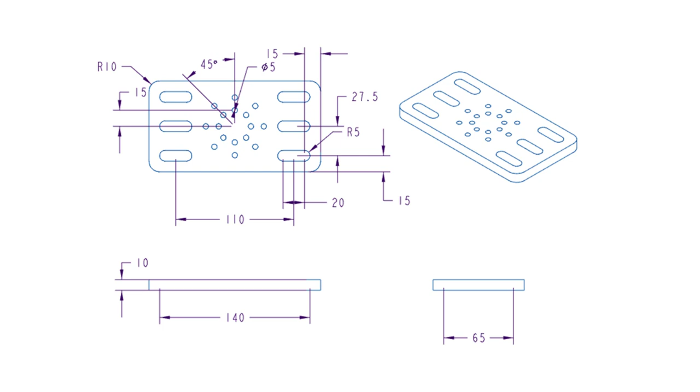Here's the 2D drawing for our Day 3 model, the slotted base plate. It's a 140 by 65 millimeters plate, 10 millimeters thick with rounded corners. We'll create racetrack slots on both sides, add fillets, and then use linear and axis patterning to finish the design. This model is a great way to practice extrude, cut, fillet, and pattern tools in Creo. Let's begin creating the slotted base plate using the given 2D drawing.

First, open the sketching environment by clicking on the New tool. In the dialog box, make sure the Part radio button is selected under Type, and Solid is selected under Subtype. Now, in the File Name field, type Slotted Base Plate. Clear the Use Default Template checkbox and click OK. In the New File Options dialog box, select MMNS Part Solid Abs and confirm with OK.

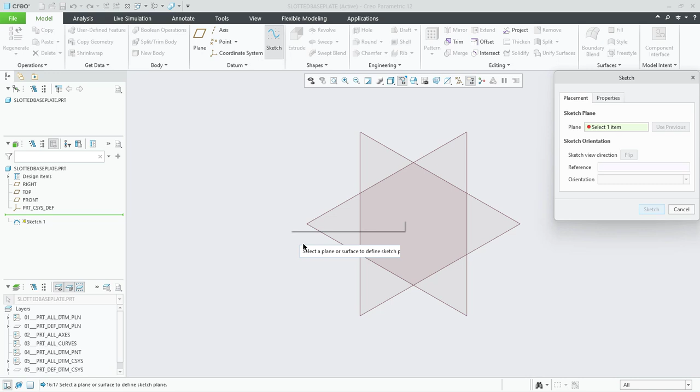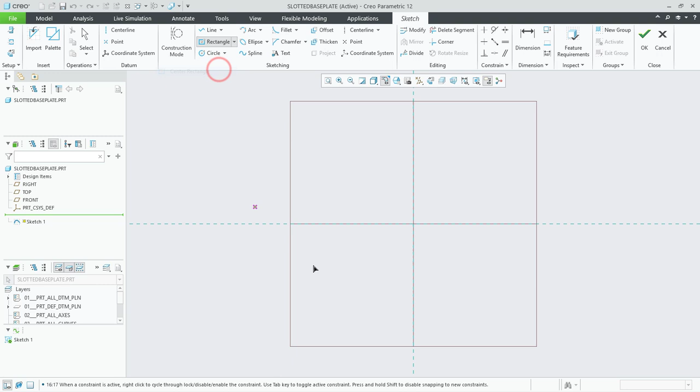Now let's start sketching. Click on the Sketch tool in the Datum group, select the top plane, and then click Sketch in the dialog box. The sketching environment is invoked. Adjust the orientation by choosing Normal to from the Sketch View tool in the In-Graphic toolbar. Expand the Rectangle tool, choose Center Rectangle, move your cursor to the origin, and place the rectangle with its center at the origin. Press the middle mouse button to exit the tool.

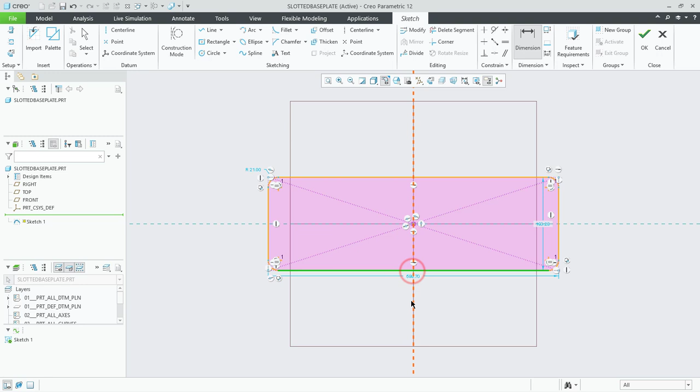Next, apply fillets to the rectangle corners. Expand the Fillet tool, select Circular Fillet and apply it to each corner one by one. Add an equal constraint so all fillets are the same. Now let's add the dimensions. Click on the Dimension tool, set the length to 140, the width to 65, and the fillet radius to 10. Once that's done, exit the sketch by clicking on the green tick button.

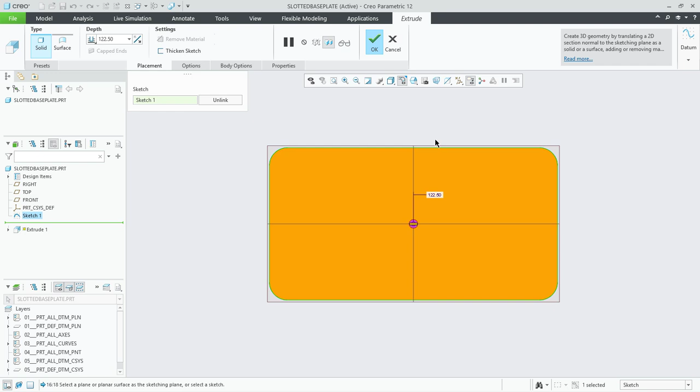With the sketch ready, we'll extrude it. Select the Extrude tool and switch to the standard orientation. Under the Depth option, choose Symmetric. And in the Value field, enter 10. Confirm the extrusion with the green tick button.

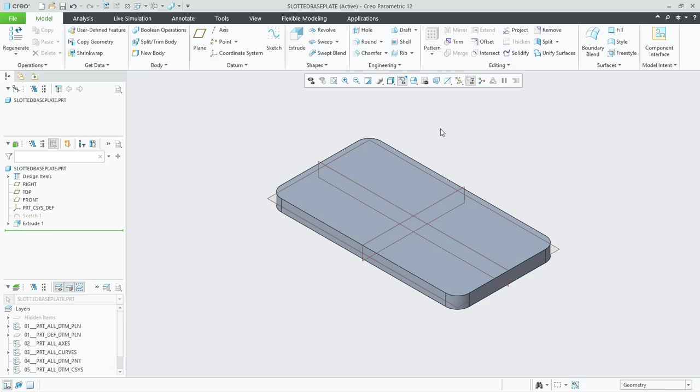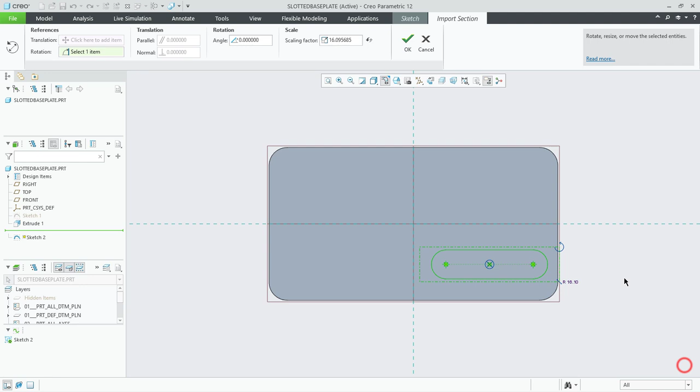Next, let's create the slot. Start a new sketch on the top surface of the model, and again, set the orientation to Normal to. Open the Palette tool, go to the Shapes tab, and double-click Racetrack 1 center to center. Place it on the model, close the dialog, and confirm with the green tick button.

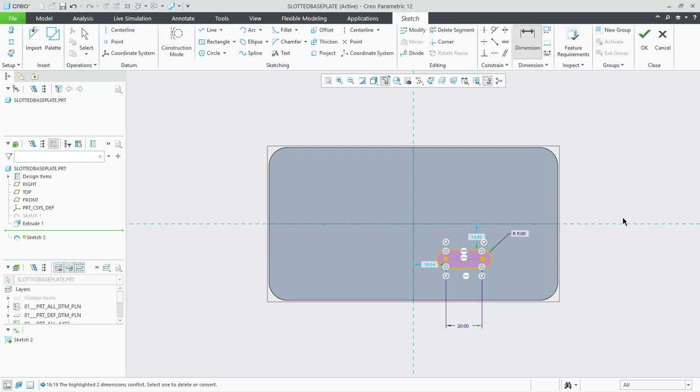Now let's dimension the slot. The distance between the two center points is 20. The slot radius is 5. The distance from this center point to this reference line is 15. And the distance from this center point to this reference line is also 15. Once done, exit the sketch with the green tick button.

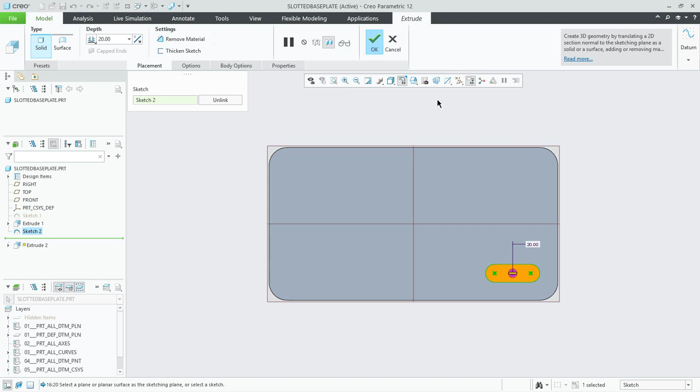To cut the slot, use the Extrude tool. Switch to the standard orientation, flip the direction, and make sure Remove Material is selected. For the depth, select Through All under the Depth option. Confirm with the green tick button.

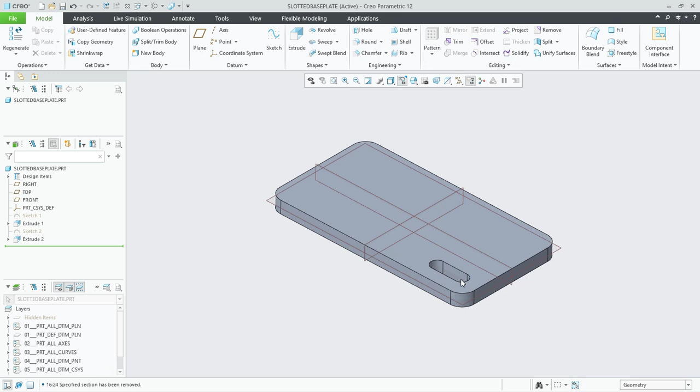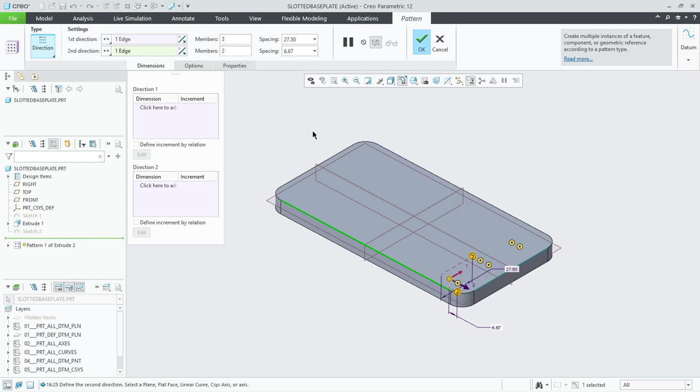Now we'll create a pattern of this slot. Select the Extrude feature from the model tree and click on the Pattern tool. In the Type area, select Direction. For Direction 1, pick the vertical reference line. Enter 3 members with spacing 27.5. For Direction 2, pick the horizontal reference line. Flip the direction and set 2 members with spacing 110. Confirm with the green tick button.

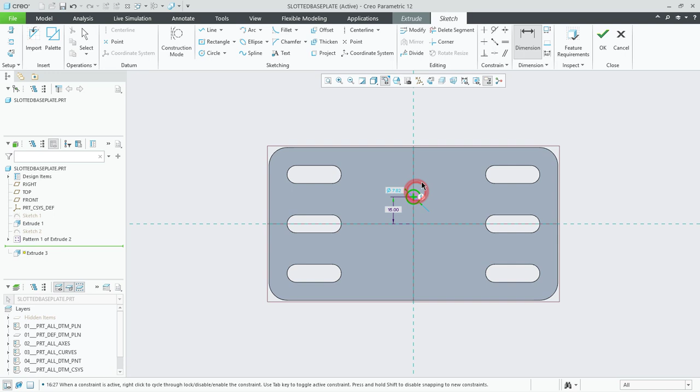Next, let's add another feature. Click on the Extrude tool and select the top planar face of the base feature. Now you've entered the sketching environment, change the orientation to Normal to, and select the Circle tool. Draw a circle. Now let's dimension the circle. The distance between the center point of the circle and the horizontal reference line is 15. The circle diameter is 5. Once done, exit the sketch with the green tick button.

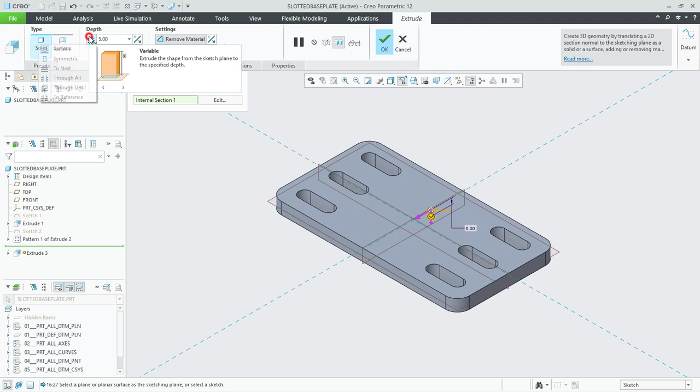You'll now see the circle ready to extrude cut. Switch to the standard orientation, flip the direction, and make sure Remove Material is selected. Under the Depth option, select Through All and confirm with the green tick button.

Finally, let's pattern this extrude cut. Select the Extrude feature from the model tree and click on the Pattern tool. This time, select Axis from the Type drop-down. To define the axis, display the coordinate system by expanding the Datum display filters and select the CSYS display, then select the Y-axis. Now, set the pattern values.

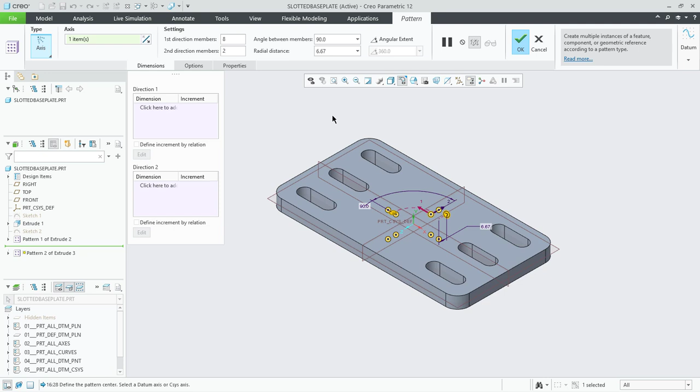In the first direction, enter 8 members. In the second direction, enter 2 members. Set the angle between members to 45 and the radial distance to 12. Confirm the pattern with the green tick button. And that completes the design of the slotted base plate.

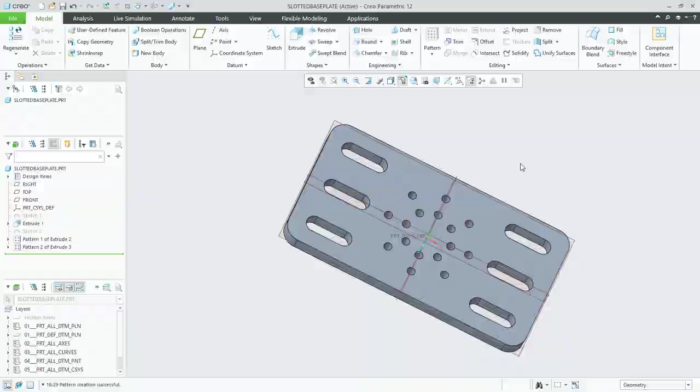That's a wrap for day 3. We just finished the slotted base plate. Great work following along. Remember, this challenge is all about practice, so don't worry if your model isn't perfect yet. Each day you're building more confidence in Creo.